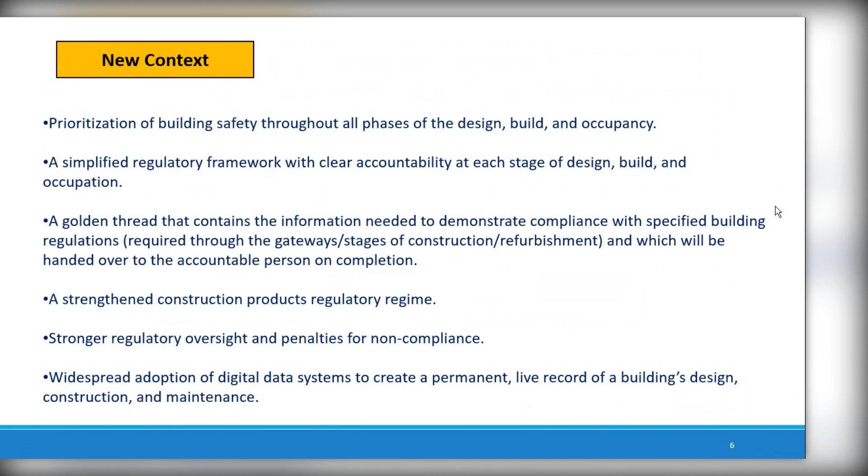So these new regulations have brought in really a new context for safety in high-rise residential buildings, and particularly the prioritisation of building safety through all the phases of design, build and occupancy, a much better and simpler regulatory framework, a golden thread of information, strengthened construction products regulations, stronger regulatory oversight, and widespread adoption of digital data systems to create a permanent live record of a building's design, construction and maintenance.

I thought it's useful to just pull out the key parts of the Building Safety Act which really relate to what we're talking about today. There are many other topics covered in the Building Safety Act, but Part 4 is the one which really applies to what we're talking about.

So the Act refers to higher risk buildings, but in paragraph 65, it defines what that means. It means a building that's at least 18 meters in height, has at least 7 storeys, and contains at least 2 residential units. The safety case report is a report which the principal accountable person will have to prepare

and submit to the building regulator in accordance with sections 83 and 84. Section 83 talks about the assessment of building safety risks, and section 84 talks about the management of the risks. And building safety risks under the Building Safety Act are very specifically defined as the spread of fire and structural failure. There may well be other risks for the building, but they're not covered by this particular act.

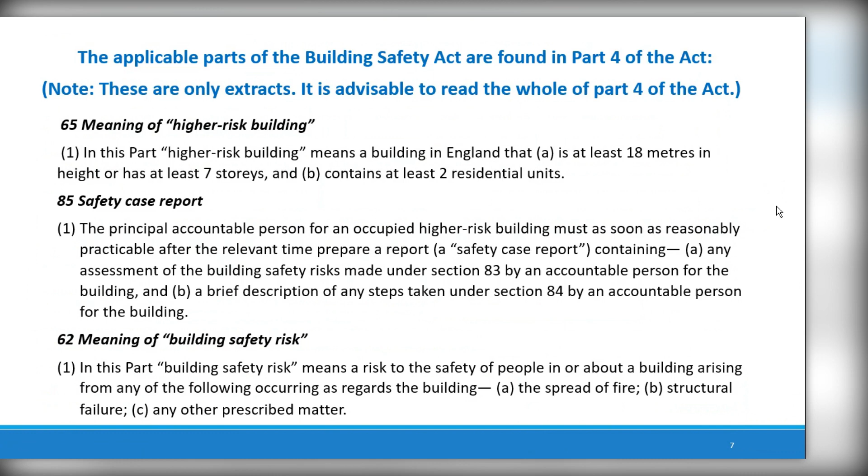So when we put in a building safety case report, we need to be particularly talking about those two things. Section 83 is that the accountable person must carry out an assessment of the building safety risks, and section 84, they must manage those risks.

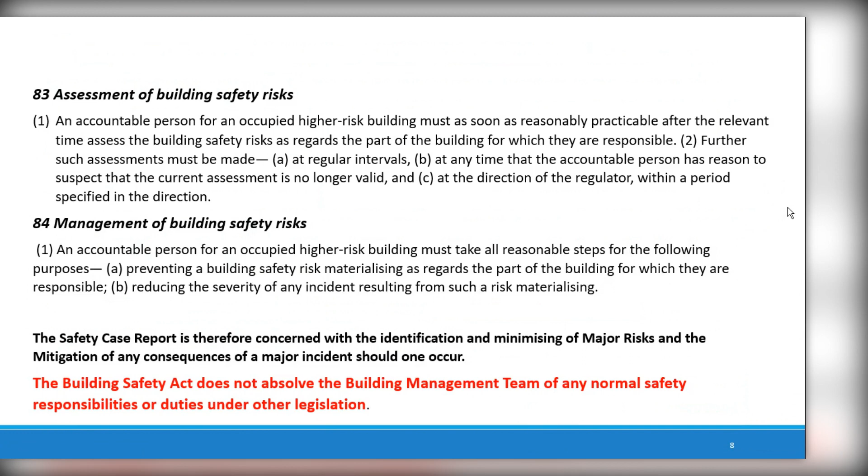And just at the bottom I put there, the Building Safety Act does not absolve anybody from any of the normal safety responsibilities. So it's not just one act that you have to think about, you have to think about all your other responsibilities.

Building in scope, so paragraph 65 said what a high-risk building is, and the total number of buildings which comply with that, in the last report which I have, published in March 2021, said there were 12,500 buildings in total.

6,500 of those are private sector buildings and 6,000 social sector buildings. So there's a lot of buildings, and clearly the majority of those buildings are going to be always existing buildings, because new buildings are coming on stream at a relatively smaller rate.

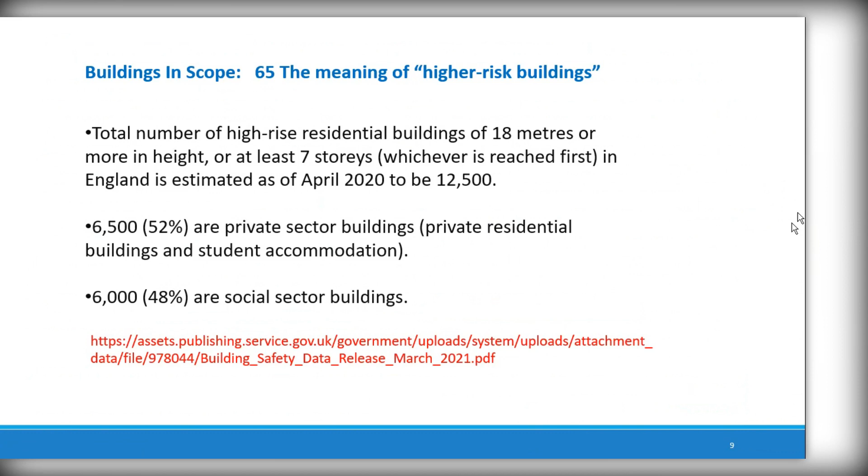So here's a typical in-scope residential building timeline, just to try and show what's going on. So we imagine a new build or change of use from a commercial building to a residential building may take 2 to 3 years. And then perhaps every 10 years or so, or maybe longer, there'll probably be some kind of major refurbishment. But the overall occupation of these kind of buildings is typically around 40 years.

And below that stream, we have the 3 gateways which were introduced following the Hackitt report. Gateway 1 planning is now in action, and that is a gateway you have to pass through to get your planning approved. Gateway 2 is a gateway you have to pass through to allow construction to begin. Gateway 3 is a gateway you have to pass through to allow occupation to begin.

During those 3 stages, we have various mandatory roles. Clearly at the beginning of Gateway 1, we have a client. Then as we go through, we have a principal designer and principal contractor. When we get to Gateway 3, we will then have occupation, and then we have a principal accountable person. And that person, or their successors or organization, must exist right the way through the life of the building.

When we have a major refurbishment, we probably may have a principal designer and principal contractor again, but if the residents remain in residence during the refurbishment work, then the principal accountable person is going to have to continue his job through that. And the safety case really starts from the beginning of the building - in some ways you could say it starts in the initial detailed design. So I've shown that somewhere through the construction phase.

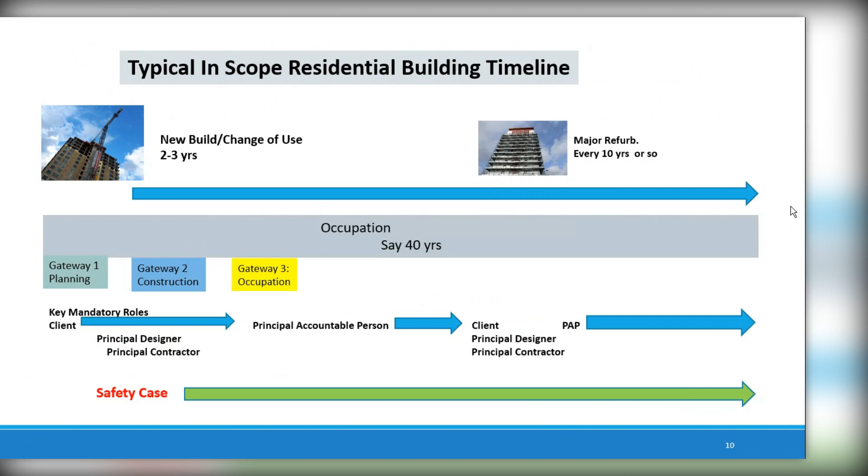So just to reiterate these 2 points, the golden thread - the idea is that the critical information about a building should be stored safely somewhere so that it can be accessed and passed on to further owners through the years. So in 40 years' time, it's still possible to find out details of how the building was built, designed, and maintained. Those of you who are responsible for old buildings will know that sometimes it's really quite difficult to find this kind of information about the beginning of your buildings. So we're hoping that in the future, buildings will carry with them this kind of record of their life cycle.

The transition stages, these gateways came in. Gateway 1 came into force on August 1st of 2021, so that's in place. It ensures that fire safety is a consideration at the design stage, and the developer must submit a fire statement in order to get planning permission, and the health and safety executive is involved in whether or not that planning permission is allowed. Gateway 2 and 3 are expected to come into force in October 2023.

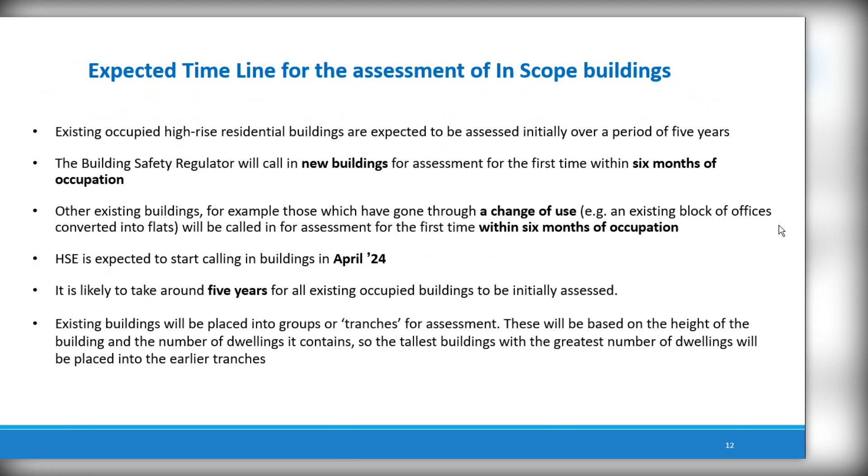So the expected timeline for assessment of in-scope buildings is likely to take a period of 5 years to complete. The building safety regulator plans to call in new buildings within the first 6 months of occupation. HSE will start calling buildings in April 24, next year, and they'll be called in groups or tranches for assessment. This is what we expect to happen.

Basically, the buildings were called in according to their assessed hazard factors - the height of the building and the number of dwellings. So down the left-hand side, you have the different heights of buildings. If we take the first height, that's 50 plus meters, and go across, we see all of those buildings will come into hazard tranche 1, except for buildings which are only from 2 to 10 floors, or 2 to 10 dwellings, which will be in the last tranche, tranche 5.

And then as you go through, for example, take a building with 49 to 53 dwellings, at a height of 30 to 49 meters - that will come in tranche 3. But if the number of dwellings goes up to 54 to 73, that would then fit into tranche 2.

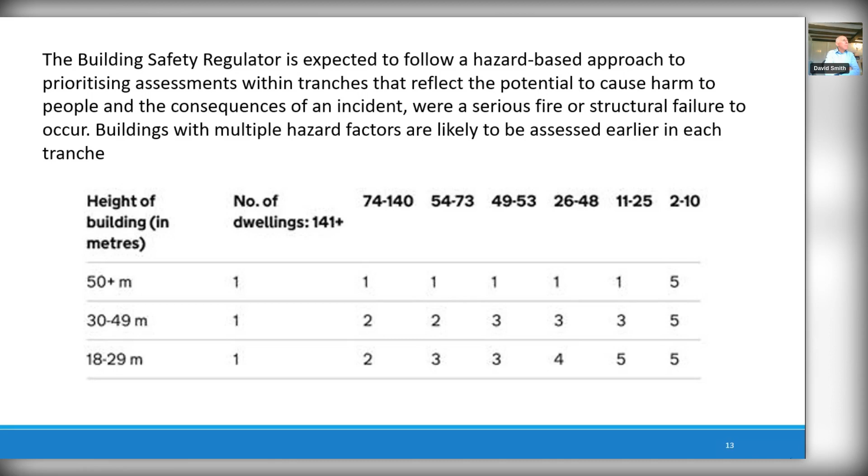So the distinction between the safety case and the safety case report: the safety case is really the whole of the safety information and supporting evidence and the activities which go on to make the building safe. The safety case report is a document that goes to the regulator to make the claim for the argument of resident safety, saying we believe this building to be safe because. It summarizes the key components of the safety case with only references to the supporting documentation - it doesn't contain all the different reports and detailed summaries of everything that's going on. It is a report which the regulator can read and come to a conclusion of whether it's justifiable to allow this building to go ahead.

So I thought it's useful to give a brief history of safety cases.

Very early on was the nuclear industry, and there was a big release of radiation at Windscale nuclear reactor in Cumbria in 1957. That was followed by the Nuclear Installations Act 1965, which introduced a licensing regime including the necessity of having safety cases during all phases of operation.

In 1974, royal assent was given to the Health and Safety at Work Act, which introduced the idea of the duty holder, somebody who was personally responsible for what was going on.

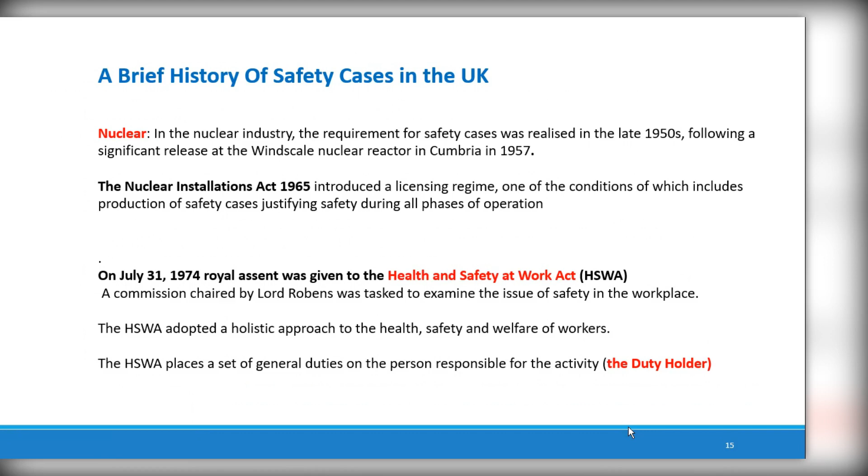In the offshore oil and gas industry, safety cases were introduced following Lord Cullen's report into the Piper Alpha oil rig explosion in 1988. The actual regulation was introduced in 1992, and reviewed in 2005, requiring safety cases to be submitted to the Health and Safety Executive.

In the chemical and petrochemical industry, Control of Industrial Major Accident Hazards, CIMAH regulations, were introduced in 1994, following accidents at Flixborough and at Seveso in Italy. They were later replaced by COMAH. Key among requirements is the production of a safety report, which demonstrates adequate consideration of dangerous substances and so on.

The railways introduced the Railway Safety Case Regulations in 1994, and on the side of air, safety cases were formally adopted as a military platform requirement in 2002. For civil aviation, CAP 760 introduced safety cases in 2010. So now we have in the building industry, the Building Safety Act of 2022.

There's a useful paper to read by Mr. Inge, which I've put a signpost to there.

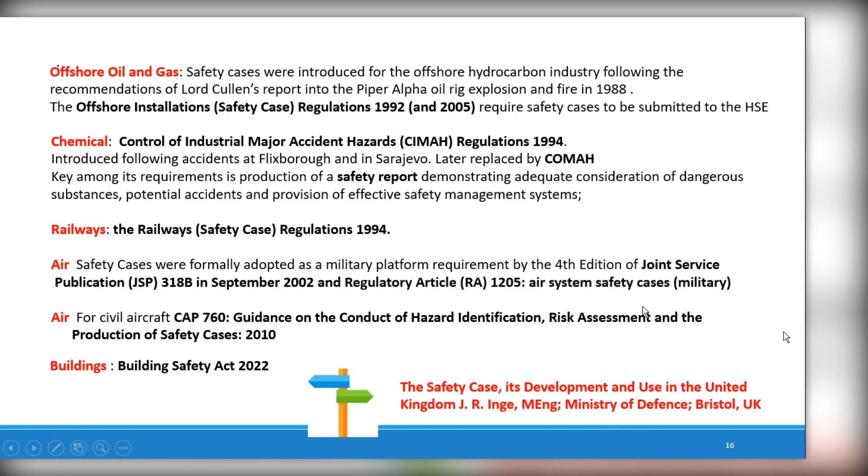I thought it'd be useful also to mention the Nimrod review. This was a review of a crash of an RAF Nimrod plane in Afghanistan in 2006. It's useful to be aware of because there was actually a safety case prepared for this aircraft type, but it failed to highlight the problems. It's really a cautionary tale of not getting into a tick box mentality with safety cases.

The safety case needs to be a live document, a live situation, and the safety case report really is a summary of the safety case. You could almost call it a kind of audit of the safety case.

I've put at the bottom there a reference to HSE's support documentation and help. These are very useful files to consult for detailed information of what is expected of you.

So the safety case report process we're suggesting is to help you get your safety case report properly prepared. It's a series of process steps, and we imagine these might well be carried out as workshops, possibly with facilitators. Obviously each organisation is different and will want to develop their own process over time, but this is the suggested process to form a starting point.

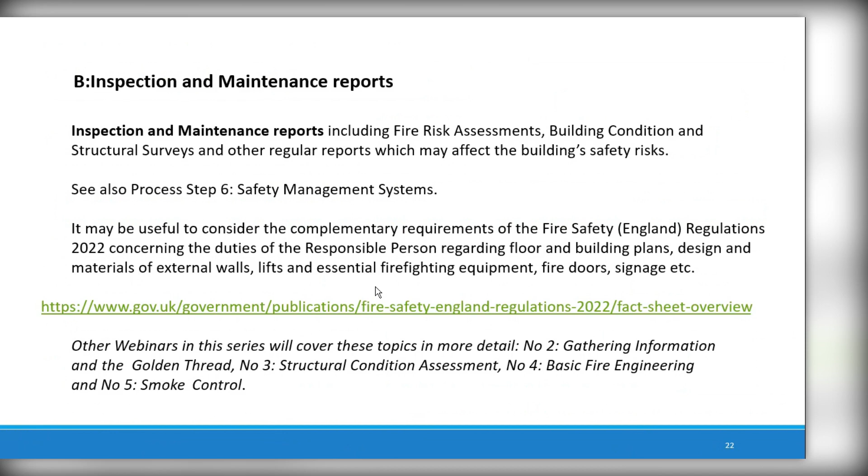Hazard identification is the next stage in our suggested process, and the definition of hazard is a potential source of harm. Now interestingly, the Building Safety Act doesn't use the word hazard at all, but it identifies spread of fire and structural failure as major building safety risks to be considered.

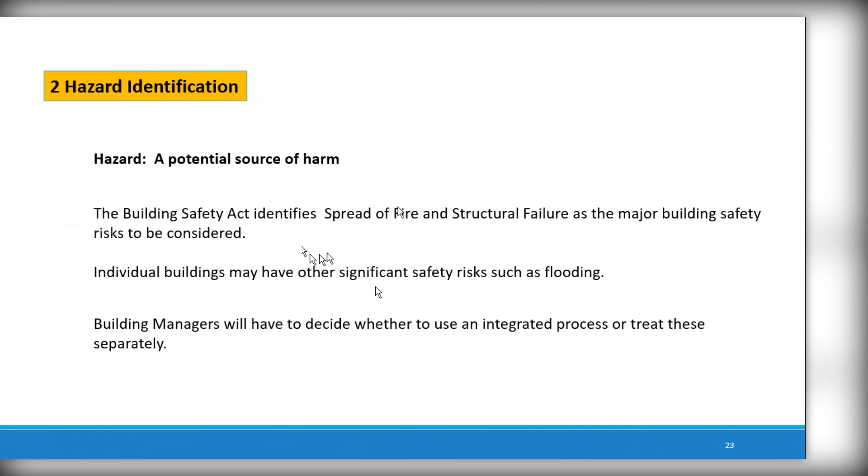Other individual buildings may have other risks to consider, but building managers will have to decide how to deal with this, because the safety case report should only deal with spread of fire and structural failure. So here's some specific guidance, which is extracted from the HSE Safety Case Principles guidance.

There again, it underlines that fire spread and structural failure are the requirements of this particular legal requirement. Other risks for people may be included in the new regime in the future. But don't forget, you must continue to comply with the other legislation that applies to your building.

And there's a lot of it, and this exists in relation to Legionella, for example, asbestos, gas supply, fire precautions, pest control, and build-up of refuse. And don't forget also the Health and Safety at Work Act, which covers everything really.

So hazard identification starts with knowing what these words mean. A hazard is an activity or state of something with the potential to cause harm. So for example, if you have gas supplies in your building, gas has the potential to cause harm, obviously.

An event is a situation where a hazard is out of control, sometimes called a top event. So a hazard in the case of gas will be out of control if there's a gas leak. A threat is a factor which causes the hazard to become out of control, usually meaning some part of your system is defective.

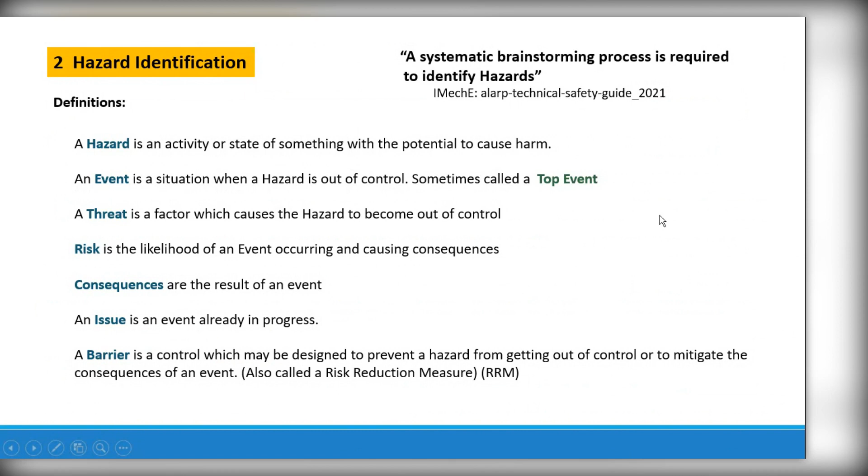Here's another example. A hazard in a block of flats may be, for example, a fire in an individual flat, regarded as a hazard for the whole building. An event is when that fire can spread, so fire spread, to the common areas and other flats. A threat would be when the compartmentation is breached, allowing the fire to escape. So in this case, compartmentation is an example of a preventative barrier.

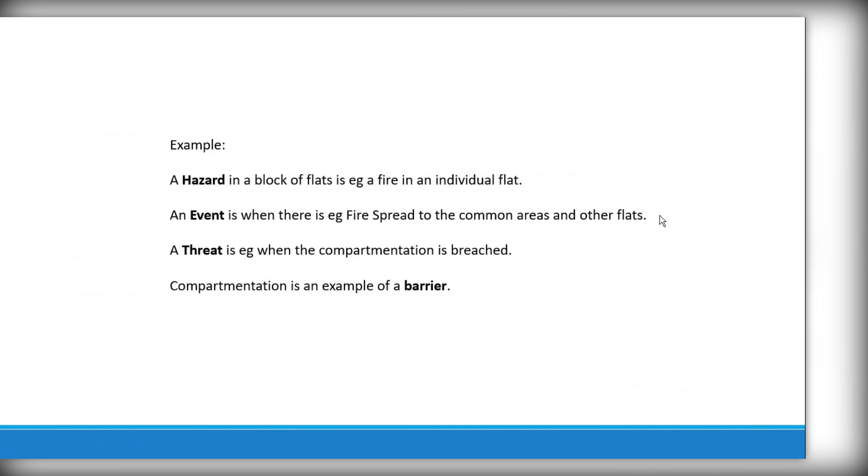So, prevention and mitigation analysis. What barriers does this building have to prevent building safety risk occurring, and to mitigate the effect of them if they do occur? Many people have found bow tie analysis quite a good way of doing this for a building, but there are other systems, and HAZOP, which is well used in other industries, is also potentially a good thing to use for new builds with complex systems.

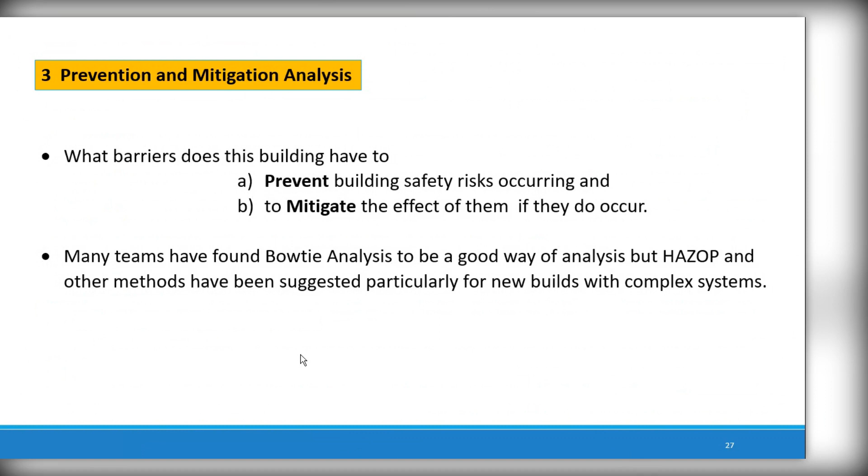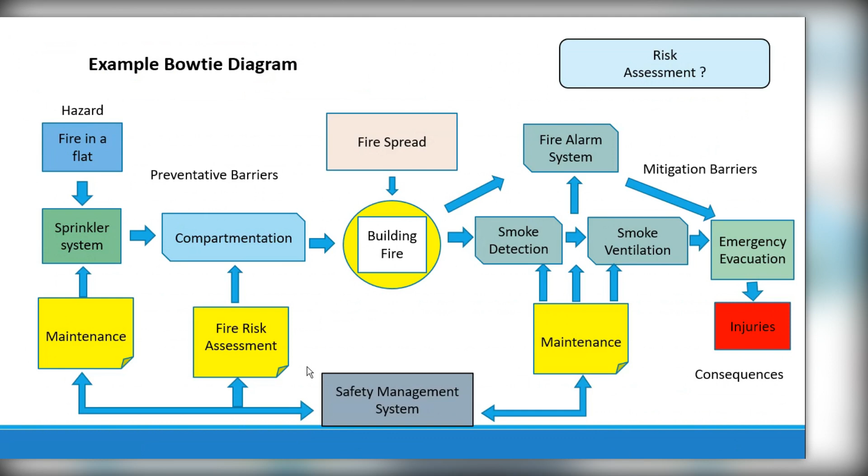At the bottom, I put the safety management system. Part of this is the maintenance of these systems, maintenance of these barriers, and fire risk assessment is getting an inspection carried out, and so on. So these all hang together quite nicely in the bow tie diagram. And if this is prepared using a workshop with various members of the team involved, we found it's a very useful way of understanding how your building works.

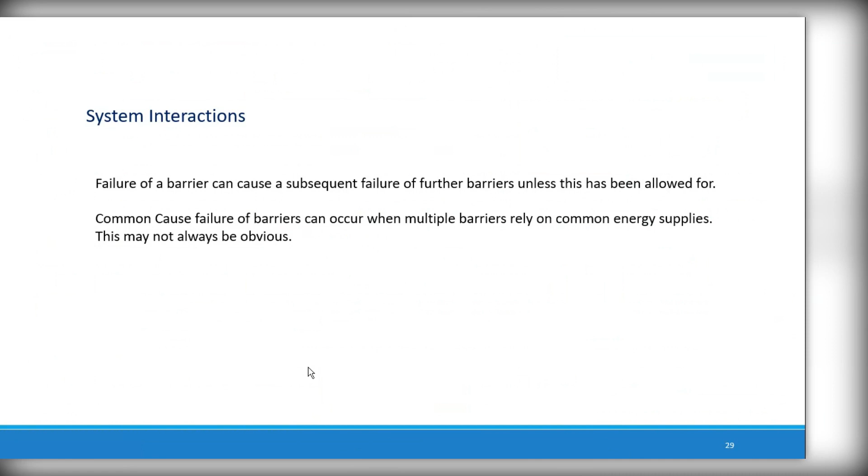We must be careful because the failure of one barrier can sometimes cause the failure of further barriers, particularly in a modern building with integrated systems. Common cause failure is something to be aware of. This can occur when multiple barriers rely on, for example, common energy supplies. So if the energy supply fails, then more than one barrier may go out of use without being clear.

Root cause analysis, the next step in our process. Root cause analysis means examining an incident stage by stage down until we find really what was the root cause of this problem. The best way of doing this really is to use actual incidents which may unfortunately have occurred in one of your own buildings, because it becomes very real then.

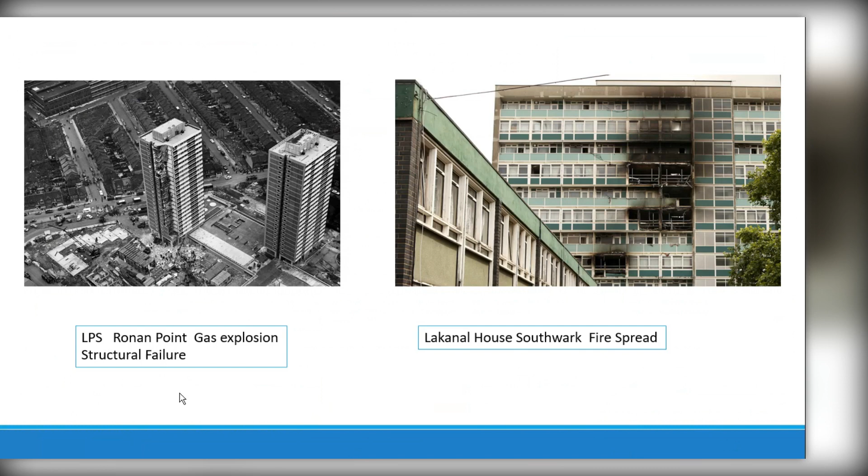So if you have them in your portfolio, you need to be well aware of the requirements of these buildings. On the right-hand side was sadly the Lakanal House fire, which preceded the Grenfell Tower fire. There you can see quite clearly the spread of fire. This fire started in one of these flats and then spread to the others. That was a warning sign which really didn't get enough notice. So unfortunately, we then had the Grenfell Tower event.

Risk analysis is working out how likely it is that things could go wrong, or how likely it is that the mitigation barriers will do their job and prevent anything too serious happening if there is an event. The presentation of risk analysis is usually done in some form of chart, and the idea is to show that all reasonable steps have been taken to mitigate your risks.

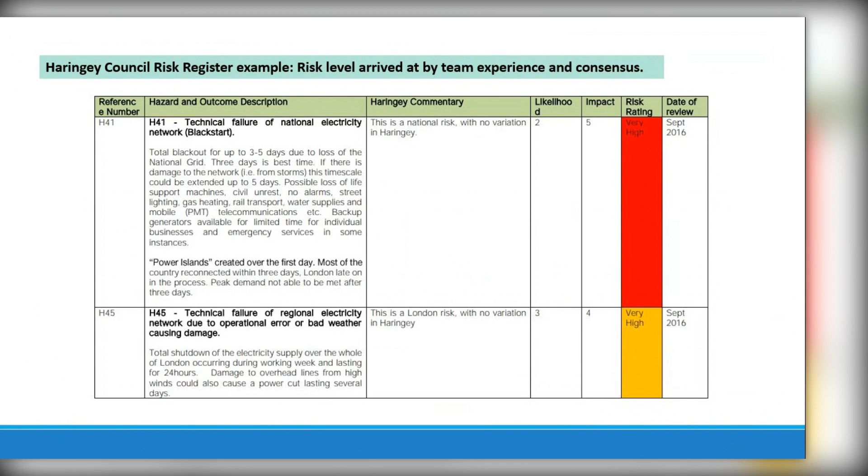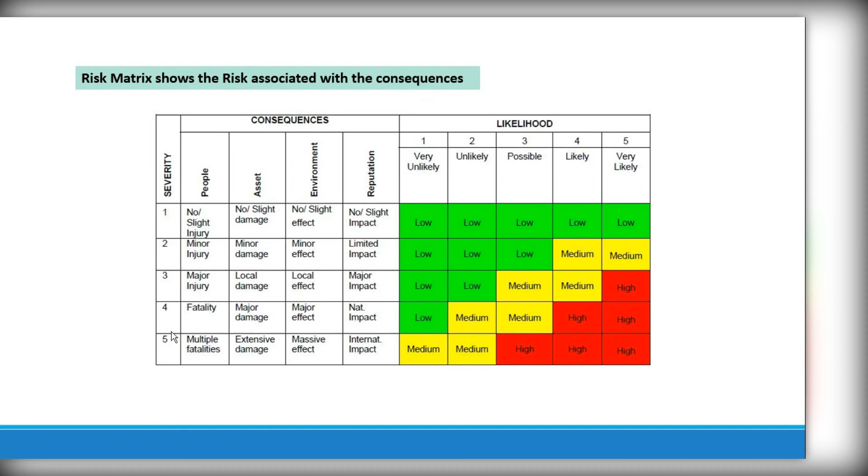For example, I've been in tall blocks of flats which are right next to schools, and if a tall block of flats starts to have fire problems, that could cause serious environmental problems to your neighbours. Reputation is really about the reputation of the people running the building. And likelihood is how likely it is that this particular kind of event occurs. So you put together the severity and the likelihood of it occurring, and you get again a red, yellow, green type of explanation.

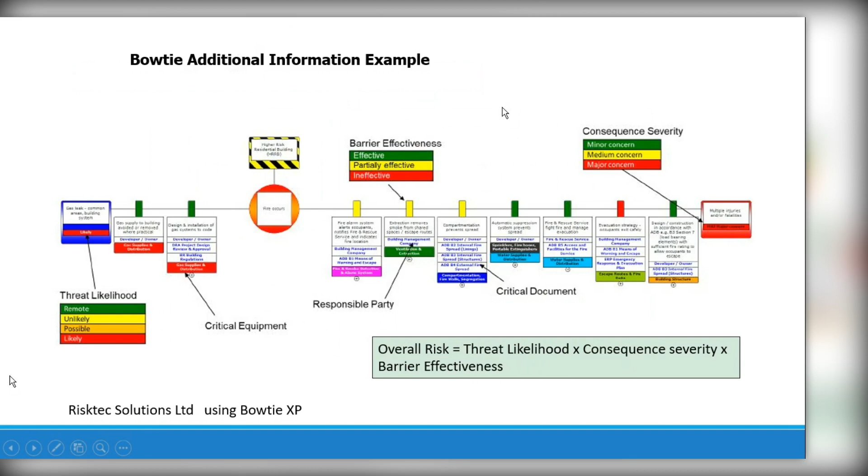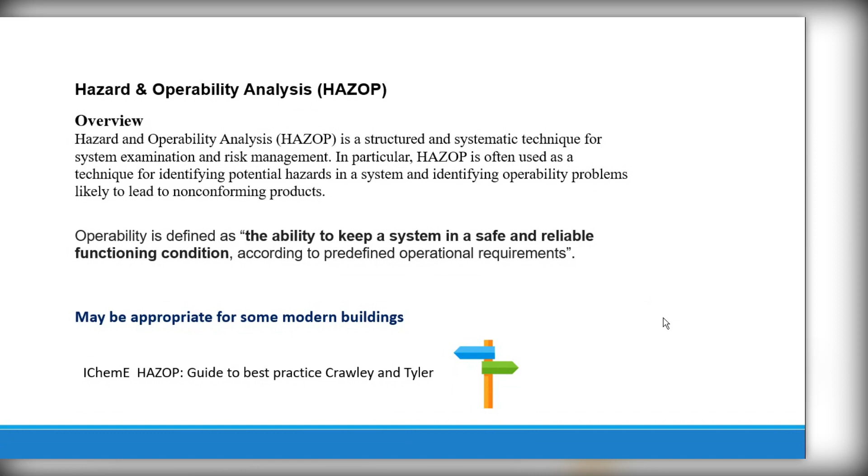However, the way in which a HAZOP investigation is carried out is a very good way of carrying out any investigation, in that it has a chairperson, a scribe, and so on, with a particular way of tackling the problem. So I think this may well be appropriate for some modern buildings, though it will need to be adapted. If you're interested, the IChemE published a guide called HAZOP Guide to Best Practice by Crawley and Tyler. It's worth thinking about if you have modern buildings.

Finally, we come here to safety management system. And safety management system is really a very critical part of the safety case. It's how you keep your whole system going. And it also is how you can achieve a continuous improvement process, which is something that you need to have if you want to improve overall building safety. Do you have one?

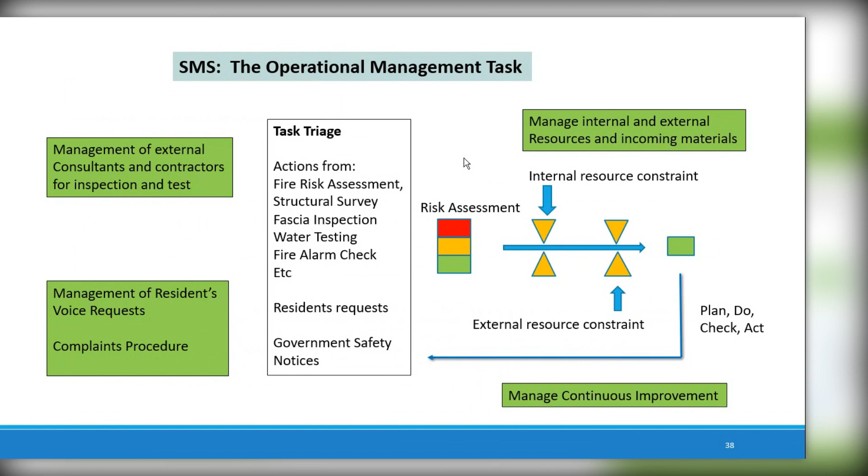It may be useful to think of it as a data flow. So across the top, I put in there, for example, inspection reports, barrier maintenance, which might be regular maintenance of different kinds of barrier, residents' voice, and planned maintenance.

So those are the data sources which generate various tasks. We then have the resource management to say how can we solve these tasks or action these tasks, the task resolution. At the bottom, I've shown a metric. So there should be really a metric associated with each of these groups of workflow. And those metrics are what will allow you to do a continuous improvement program.

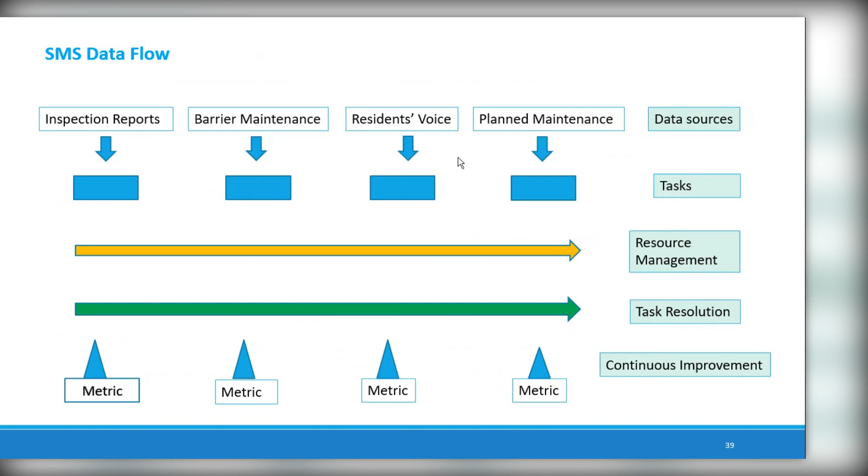One of the things that Dame Judith Hackitt mentioned particularly was learning from other industries. And I think this is a very important thing to do. There is an awful lot of information out there on the internet, of course. I think for residential buildings, we can learn quite a lot from the aviation industry. If you think about an aircraft conveying people from A to B, that really is a structure full of people, and a residential building is similarly a structure full of people. So there's a lot of commonality between these two situations. And the aviation industry has put out some good stuff on this whole safety situation.

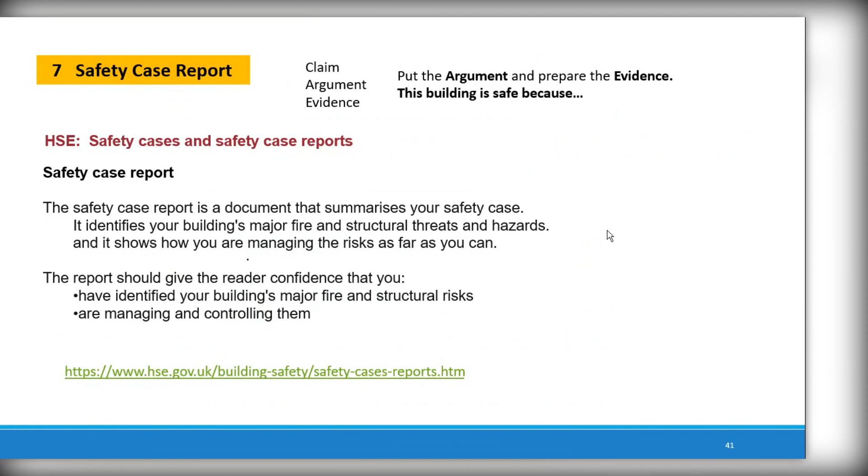The safety case report also has to take account of the fact that no system will ever be completely safe, so the goal of the argument is not that it's 100% true.

In the UK system, we come across the concept of ALARP, or in the Building Safety Act, all reasonable steps. In other words, you have to show that you've taken all reasonable steps to make sure that the building is safe. In other industries, you will find terms like ALARP and SFAIRP being used, and they really boil down to the same thing. But the Building Safety Act uses the term all reasonable steps.